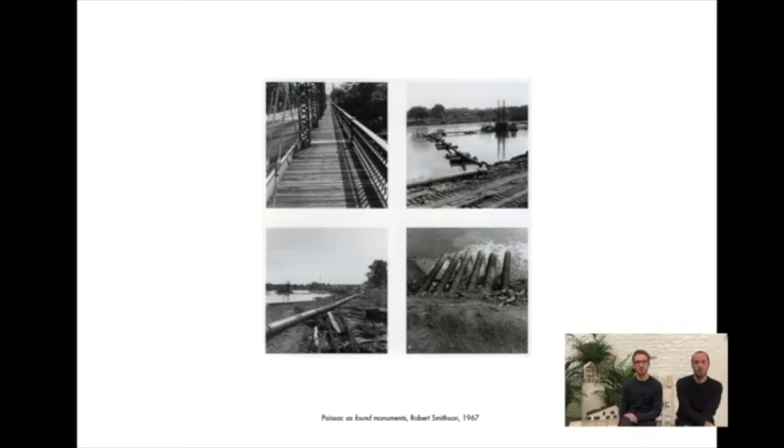Some of these layers: a place that is non-accessible, along the streets. There is though a feeling of a larger perspective coming from the railway.

As these places were unknown to the local citizen, a first action in our process was to make this space visible, which we did as collective workshops with inhabitants. This gave the opportunity to everyone to have a first encounter with the sites and to give us first inputs about the future designs.

A strong motivation during the participatory process has been to concentrate as much as possible on what was already there, in terms of human resources, material, and reuse.

Among the experiments we did, we organized a participative construction, creating a common space for the neighborhood, managed by its inhabitants. We also literally experimented with new ways of maintaining these parks, with sheep eating the grass and the vegetation.

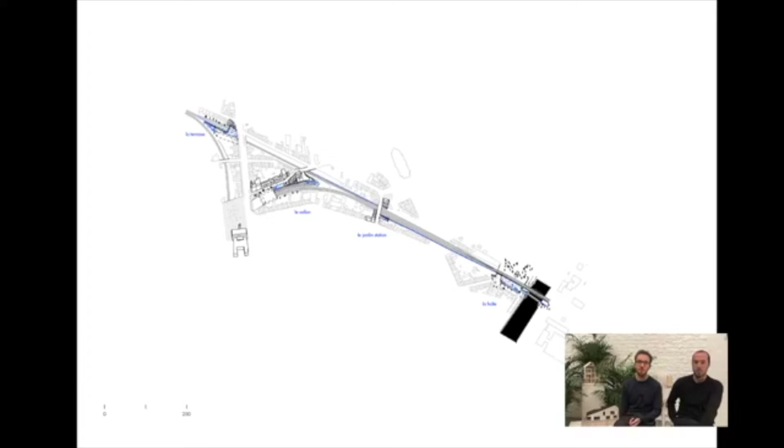4 visions are proposed, like a framework with simple principles and different appropriable uses. We name these spaces to make them exist. We make a small tour now of these 4 spaces.

The first, La Terrasse, is an urban belvedere and offers a future threshold for new housing buildings and a bike repair shop. It is an invitation to go down at the level of the railway, where playgrounds are disposed along an extension of the existing station platform. It is probably the most intense site since it's located above 2 underground trains and a metro station.

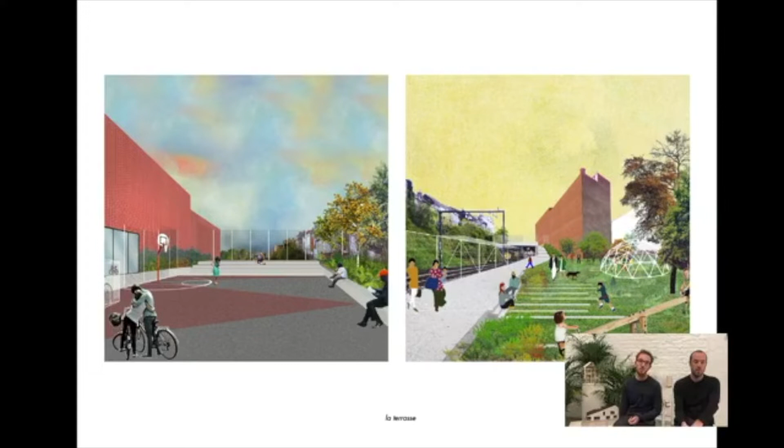Le Vallon is a place immersed in a dense green bank along the railway infrastructure, offering far-reaching perspective over an urban panorama. It is a hidden world behind branches, offering quietness and isolation.

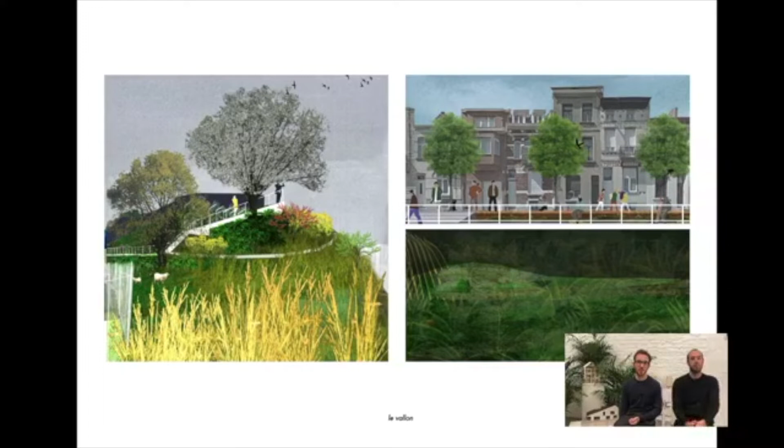Le Jardin Station is the experimental garden of the district. It is the headquarters of the activities, communication, and workshops for and with the neighbors.

And finally, La Halte, a meadow along the former rail station, facing the canal and the district's gateway to the city.

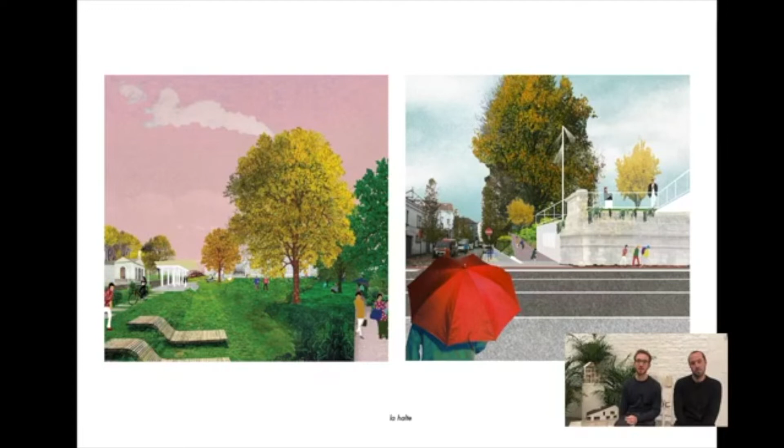Since the construction of this last pocket park is now ending, we give it some more words to better understand our intervention. So the site followed the same condition as the others. It is located along the railway on a former track, which is still visible by the now demolished bridge. Being on an upper level, it was not connected to the streets.

So he used the station as a direct entrance to his personal park and houses. But on the site, we also found quite a nice object, a little concrete railway shelter as a remain of this bigger station.

So we see now the axonometry of our intervention, as well as the model.

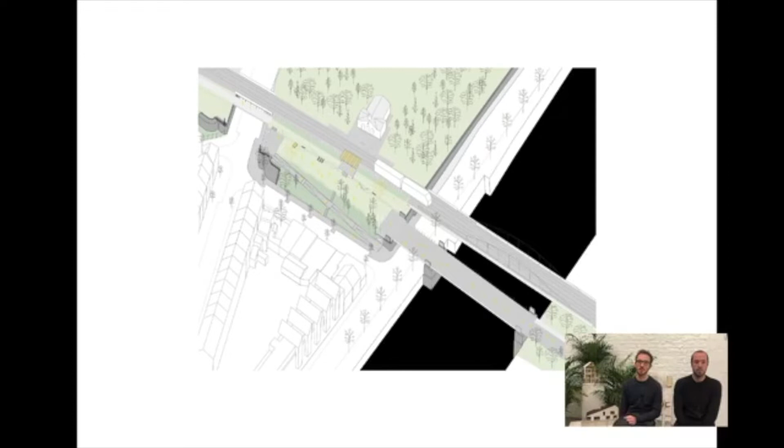So we carried simple actions to renovate this site. The space is connected to the street level with a sloped ramp and a staircase, with the entrance, the main entrance of the park, on the canal.

Two belvederes at each side of the site are placed on the former railway track walls, allowing views on the canal and on the city. In between, a meadow is installed as a place to sit, to gather, to dance, to wander, or to play.

The former shelter becomes a small monument to the park, a kiosk on a small talus with a new folded roof. We also already envisioned the future connection with the bike route on the former demolished railway bridge, which you can see at the end of the model here.

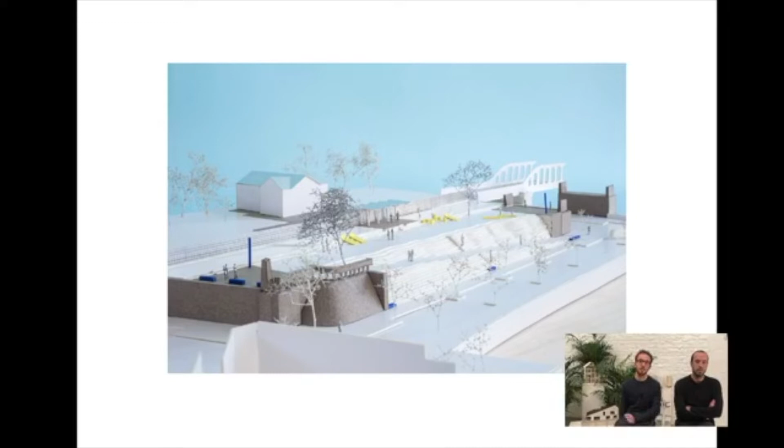This space will be soon opening to the public, and we are really looking forward to see how inhabitants will appropriate the site. We hope, with the help of the city, that the citizens will continue the local involvement they started within our small laboratory by experimenting different uses or appropriation of this open space.

We go now to another neighborhood, but in a less dense situation than the project we just saw. It's a house project in a small village, Serfontaine, in the south of Belgium. It is one of the first commissions we got.

So the program of building a new family house could seem quite banal and simple, but actually it revealed to be a very complex one for us.

A reference we use to help us in this process of designing a house is the Upper Lawn House by Alison and Peter Smithson. It embodies these questions about the archetype of a family house as an ordinary object and its relation with the surroundings. To quote the Smithson children,

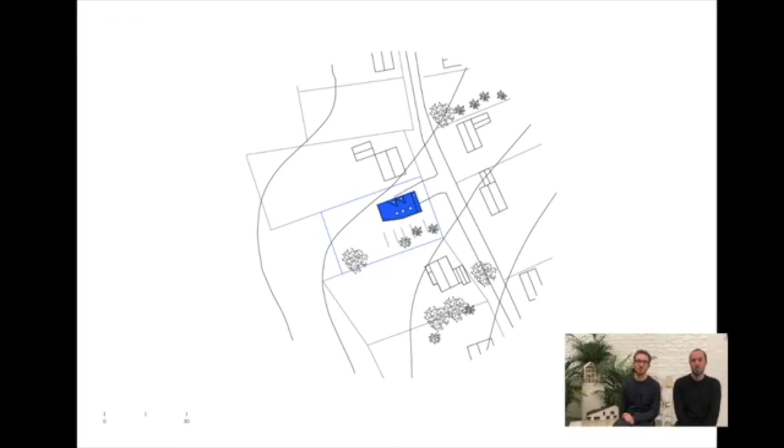The garden, oriented south, is organized along a small private path that connects a bench on the street to a vegetable garden, a terrace, and a grove at the end of the plot with another bench.

We keep the views from the street and the facing house to the landscape intact, as a politeness to the neighborhood. On the north side, a paved path connects the street to the main entrance in the center of the house.

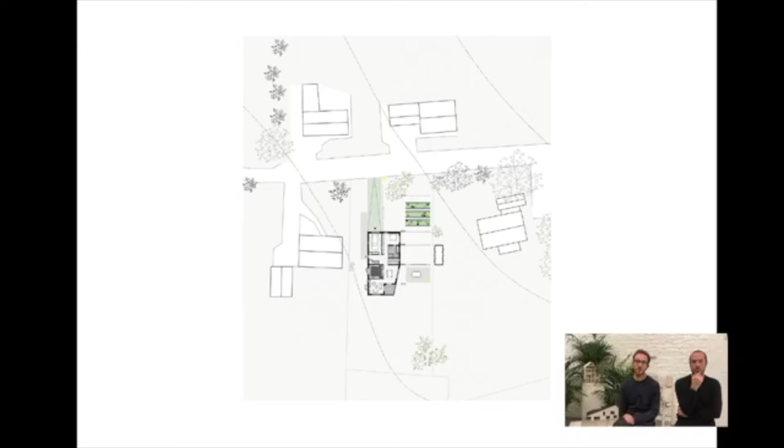By doing so, we enable a plan that distributes the entrance hall in the middle, arranging the very private space on one side and the more public or common on the other: bedroom to the east and sitting room to the west. In between the spaces, the plan is organized with alternate enclosed servant rooms that allow the house to function: garage, bathroom, laundry, and kitchen.

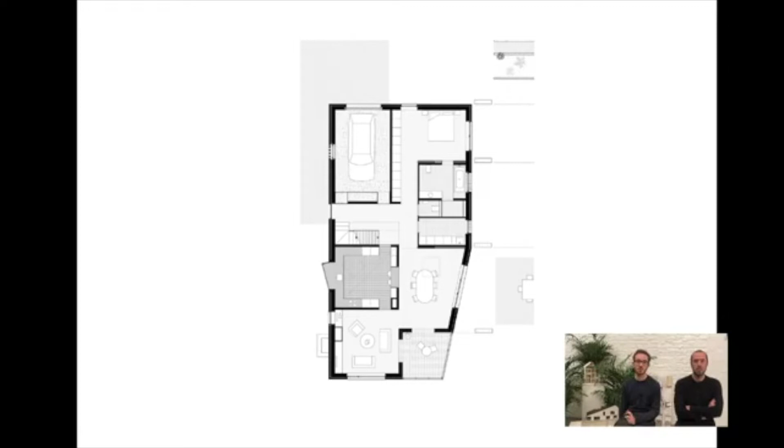The main spaces slide along these rooms, opening perspectives, enfilade, diagonal views, and an intimate relation with the surrounding landscape. Still, we kept a very practical aspect of domestic situation, with, for instance, a direct connection from the garage to the kitchen.

These spaces are set under one big roof that also reinforces this feeling of different atmospheres, from common to more intimate spaces. We see here the double height in the dining room, visually connecting to the first level dedicated to the children.

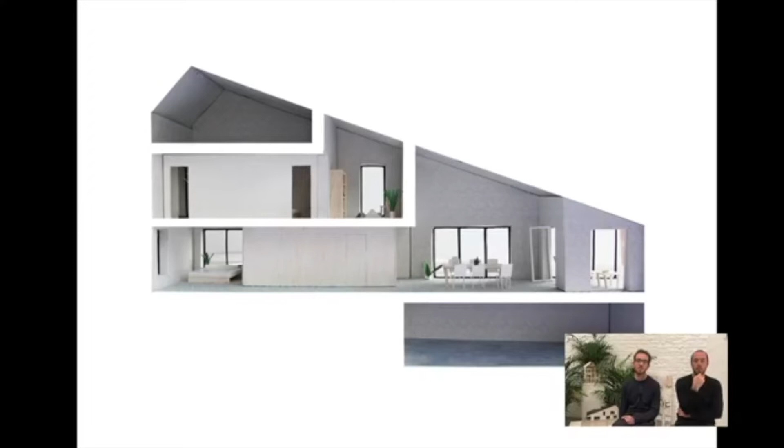We now take a small tour in the finished building. We were able to do that thanks to the extensive shooting made by the photographer Séverin Malaud.

To connect even more the facade of the house with its surroundings, we found some interesting references in the village itself: vernacular houses, built from bricks and stones of different sizes, which were all clad with a white band or chalk to give them an apparent uniformity.

But we used it with different patterns that let you guess what's inside the house, the servant room volumes, or maybe the different floors. To be honest, the contractor got a bit mad with all these patterns, but he finally did a very great job. These different patterns reflect this research into an object between an ordinary greater context and something very particular.

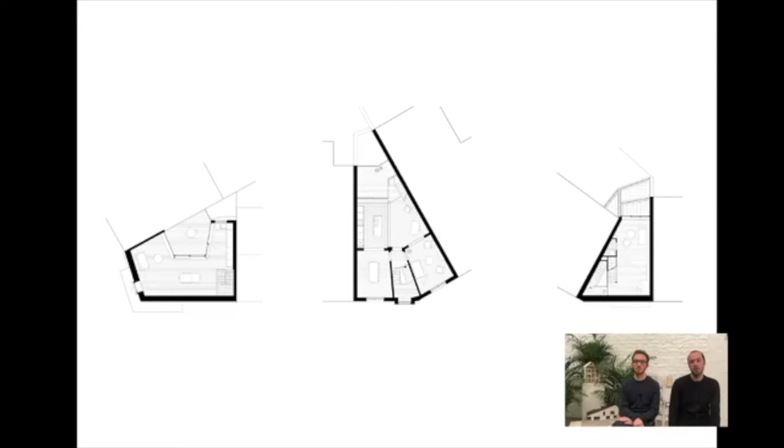The urban fabric becomes then a breeding ground for typological reinterpretation. Working within the conceptual field of the types is also a posture on how to address these constant changes and reflect on how to reuse matters and spaces, structure to accommodate our living environment.

Just like kitchens that become open, rooms made to do several things, shared space, outdoor spaces.

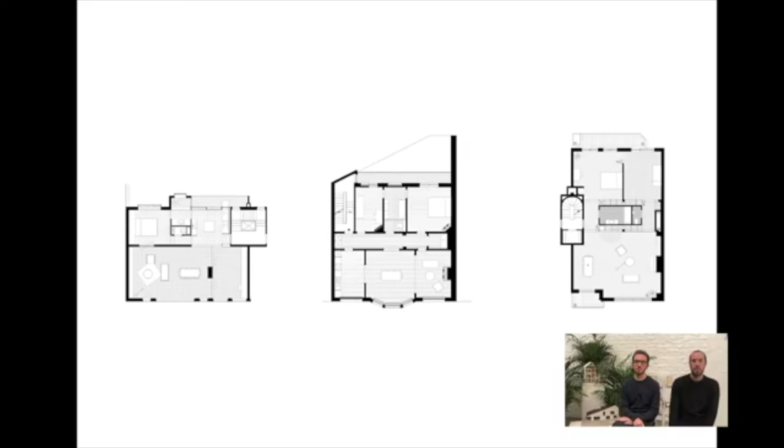And in this recurrent exercise of interpretation, some of our projects happen to be located on some anomalies in the city, on peculiar situations such as angles or distorted plots, offering generous but complex conditions for the project.

Just like this house in Saint-Gilles, which was going to be very specific, both in its shape and in the way the owner was expecting to live in.

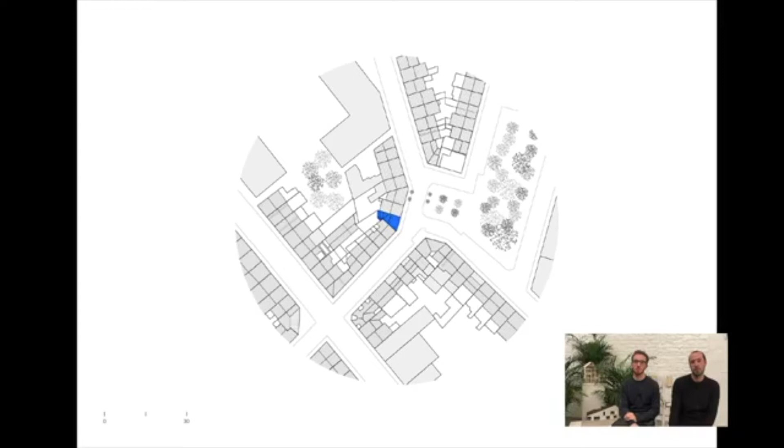So the house is part of a set of 3 houses realized as a kind of real estate operation at that time.

A vertical circulation distributes several high floors, most often arranged in a row of 2 or 3 rooms, from the street to the inner garden.

The technical spaces were historically relegated to the backyard as annexed volumes, and this typology comes to define hermetic urban blocks, les îlots, l'intérieur d'îlot, strictly defining the public from the private with the front and the back facade.

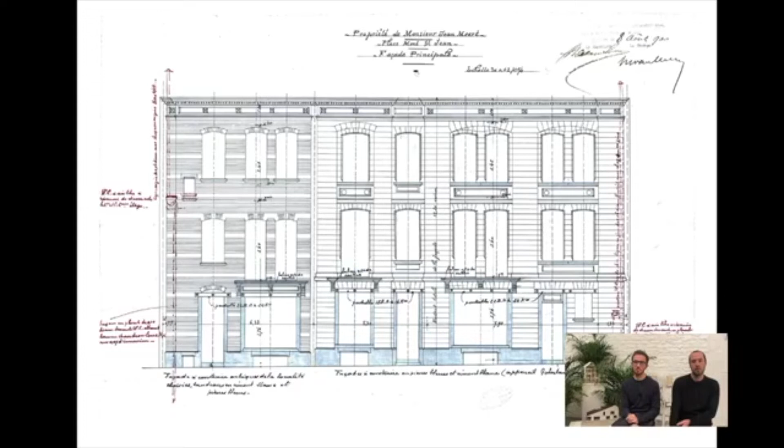So these 3 houses were designed with a standard plan and facades, which later during construction could be adjusted to the taste of the client. The project we present tonight is located on the left house in the image.

This location on a corner of 2 streets distorts the plan and closes the angle between the 2 neighbors. It generates a complex relation between the house and the courtyard, making views to the distance narrow and vis-à-vis with neighbors intricate.

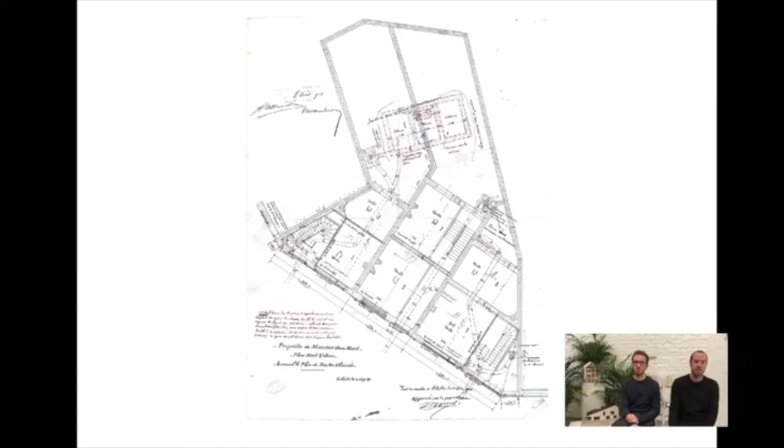On the front, on the contrary, towards the streets, the staircase invades the free surface offered by the distortion, even taking advantage of a longer facade to open a window and have natural light in the staircase.

So this is for the shape. Then the demand of the clients was to be able to live with elderly parents to help them while getting older, or later any other roommate if applicable, but to manage to live together both in an autonomous and collective way.

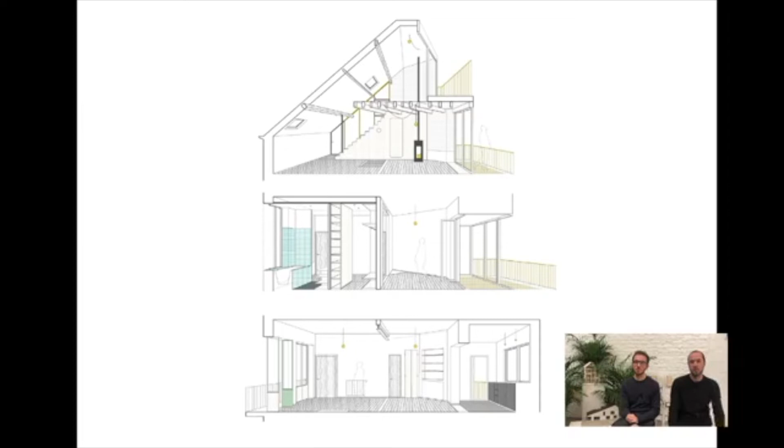So each floor was then designed and thought as a very autonomous part, almost intended as a tiny wing, as if it was a larger mansion. All the floors are interrelated through this generous staircase that I presented just before.

So let's have a quick tour inside those spaces. This is the first floor, the communal spaces, a living room, and a kitchen extending to the inner courtyard with the view and the sun.

The first apartment is a simple set of rooms, one floor, a bath, closet, and a winter garden, again extending towards the intérieur d'îlot, the inner courtyard. And then the second apartment is a small independent duplex under the roof.

A first consequence of this search for autonomy of the parts inside the house was to equip them lightly: a small shower, a stove, a kitchen, some techniques to connect to in the future, a partition wall that allows the light and the view entering from the staircase. Not so many, but they are all small devices we were very keen to reflect on, either detailing them very precisely or finding their right position in the house.

A second decision of the project was to open each floor to a proper terrace, a balcony or a winter garden, an outdoor room. Each small interior expands towards the light and the quietness of the courtyard. So adding an outdoor room augments the tiny spaces and reinforces the autonomy of those parts.

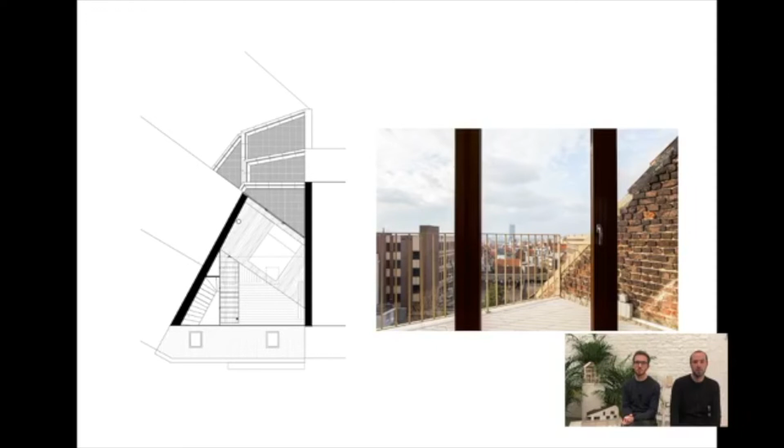So the scale of action is minor, it's just a small house, but the scale of resonance with which we enter into discussion, and that we like to testify in our project, is very broad. It brings the single element, a house, or the form of a house, in relation to the architecture of the city.

Not far from that corniche, a bit lower actually on the topography of the Senne Valley, still in Brussels, La Plaine Marie-Janson is another project. It's an existing open and public space in Saint-Gilles. It's a project we are developing in association with Studio Paola Vigano and with the support of ARA and BAS.

So doing a project of public space is complex and beautiful work we do in the practice, crossing scales, encountering human practices, and addressing the fundamentals of the project of the city as a collective construction, and literally as a common ground.

Marie Janson is the most iconic public space we are working on today, but it's presented here tonight to uncover some of our broader reflection on other places, about the project as a possibility to transform a place from its existing qualities.

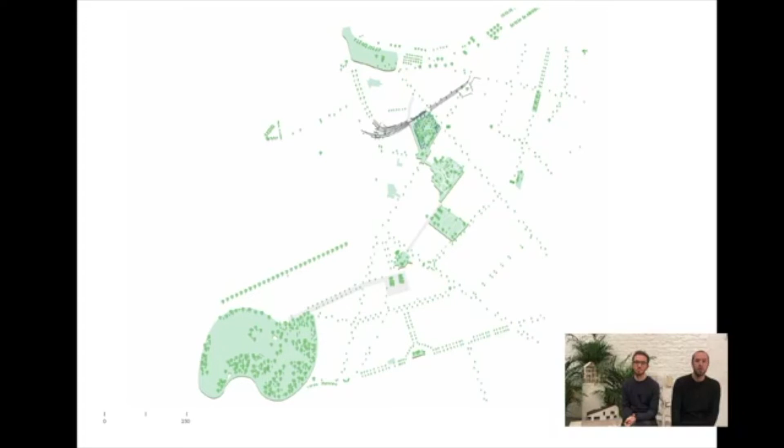So within this sequence, the Plaine Marie Janson is a pivotal point between the system of park and the Parvis, le Parvis de Saint-Gilles, an iconic place in the commune, welcoming a very intense and urban activity.

So the transformation of this square is a possibility to design a shared space that affirms the capacity for a city to sustain strong ecological values within urban structures, addressing the fundamental climatic and societal challenges.

For instance, on-site water management, rational treatment of polluted soil, diminution of the space of the car, reuse of materials, regulation of urban heat, long-term vision of our management, but also inclusivity and gender-neutral space.

These are the few points the project wants to take with as traveling companion and hopes to make manifest at the end.

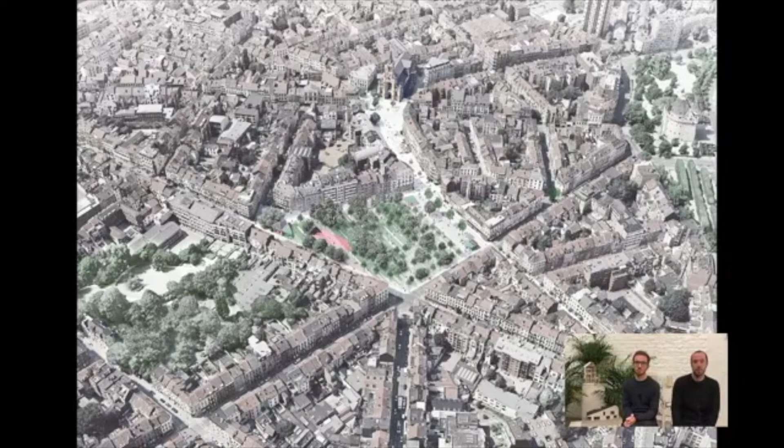So the project proposes to work with the conviction that its resources are already present on the site. And this is how we developed the design, by enhancing and recycling the element of the sites as much as possible, starting by the project of the soils.

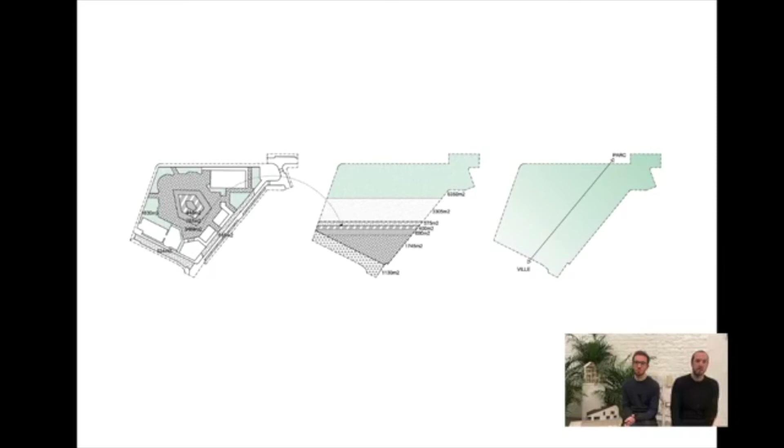After the depollution of the ground, the cobblestone of the site will be collected, sorted, and kept with a large proportion, while a large proportion of the existing surface will be demineralized into grass and permeable soils.

So the ground becomes a large sloping plain, a plaine in French, that we reorganized as a refined pattern of recycled elements, gradually following the slope and an idea of a gradient between mineral and vegetal, from gray to green, from the city to the parks.

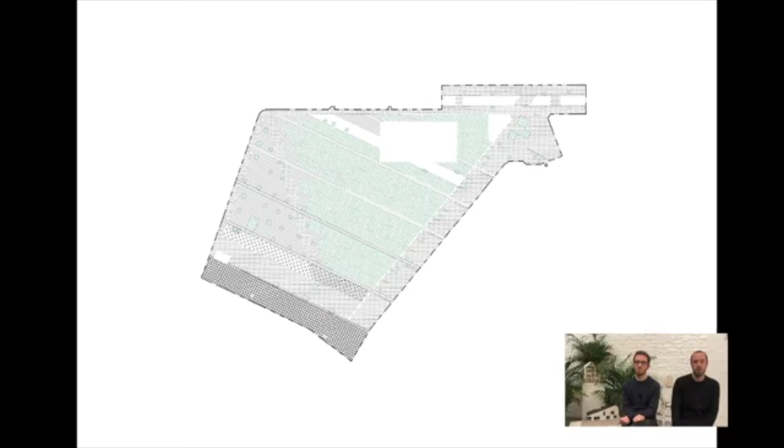It is free from obstacles, and the space is no longer drawn by the car alone. It allows water to infiltrate and makes it visible through the introduction of landscaped elements, such as small talus and

swales, so the wadis, or the noues paysagères in French.

A second strategy is the one of intensifying the canopy of trees. There are around 90 trees on site that create already today a large canopy.

Some are sick, some need care. And we will bring new trees.

We intensify this condition of a vegetal covering by planting new trees. So we also imagine that some of them complete the more generic grid of maple tree, les érables, and some other are thought as more specific, and they will grow larger and higher.

So the grid of trees is really conceived as a park for a century, a dynamic landscape that will evolve over the years.

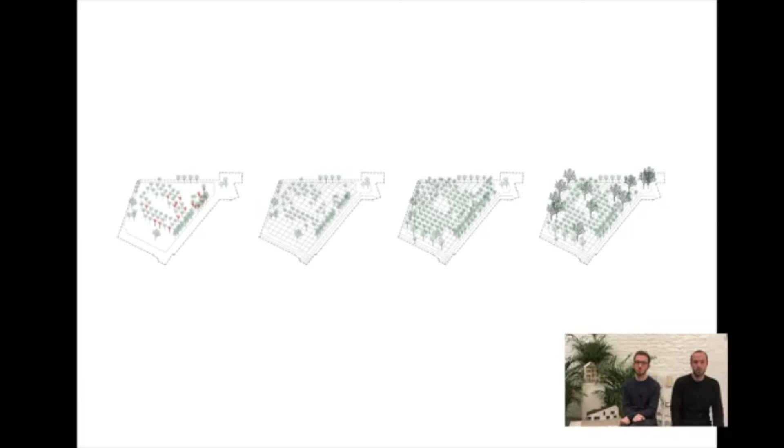So all this becomes a renewed framework for activities to take place in. It is designed as a urban and green space, but it's not a forest, or neither completely a park.

So it's called in German, it's a Baumbestandener Lusthain. It reveals a constructed atmosphere under the trees, available for practices, fun, and activities.

And so the plain in the project has to remain a space available to its inhabitants, lively and rich in activities, passages, parties. So the gradient of the soil cleverly lends itself to a variety of uses, from more intense

and seasonal activities to the daily or weekly life routine, just like markets that is already taking place today.

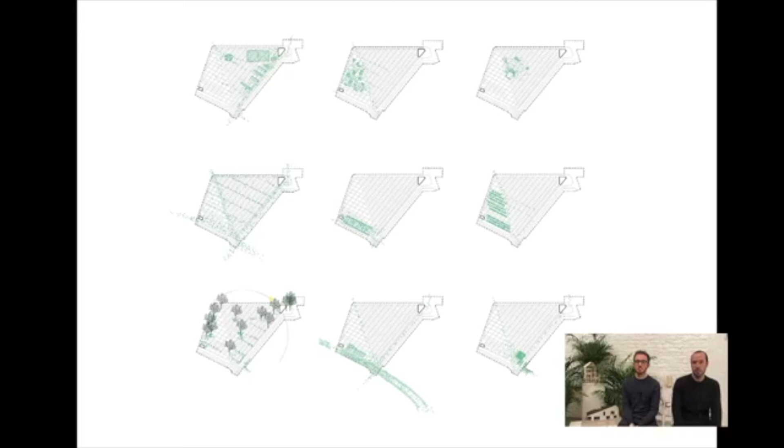So to support some of the practices, we also add 3 small architecture, the kiosk. 2 of them enter in dialogue with the relics of the former Hôtel des Monnaies, the Munthof, and a new one is proposed in between the Parvis and the Place Marie-Janson.

And is really intended as a reinterpretation of the type of kiosk or little folies one finds in a classical park. Altogether, they offer a roof, a seat, even a toilet, and they bring a sense of comfort and shelter in the place.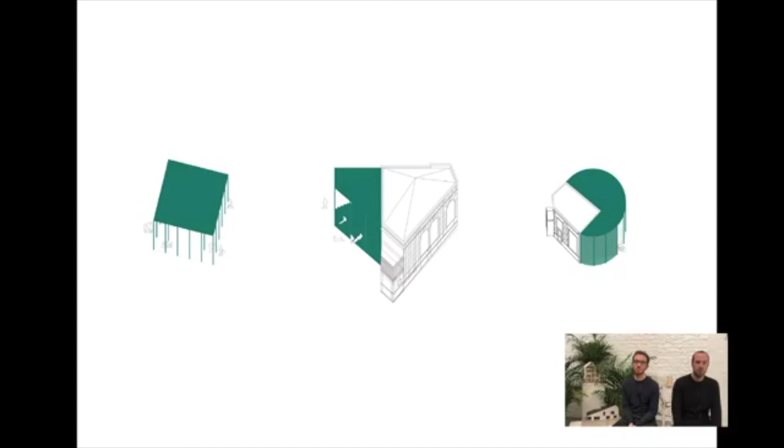So we hope that the different practices, the inhabitants, but also animals and plants will coexist well within the space of the project. As this axonometric view suggests, we hope it becomes a lively painting.

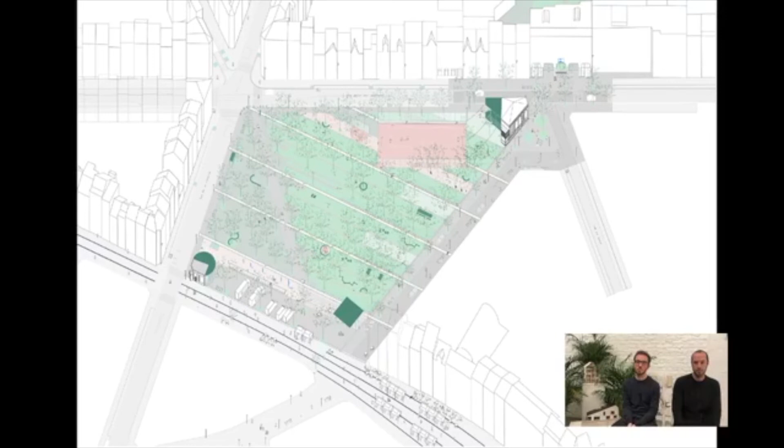So as this project exemplifies, we cultivate an interest for the existing situations and what is already there, and how we can work with this condition to intensify or bring them into our projects. This curiosity has led us to start the documentation work of the project sites.

So we feel the need to show the successive status of the place through the seasons, during the constructions, and after the realization. Maybe also because we are afraid sometimes to lose something from the place, but probably mostly to testify that these existing elements are the levers and the resources of our design, and echo the architecture of the city.